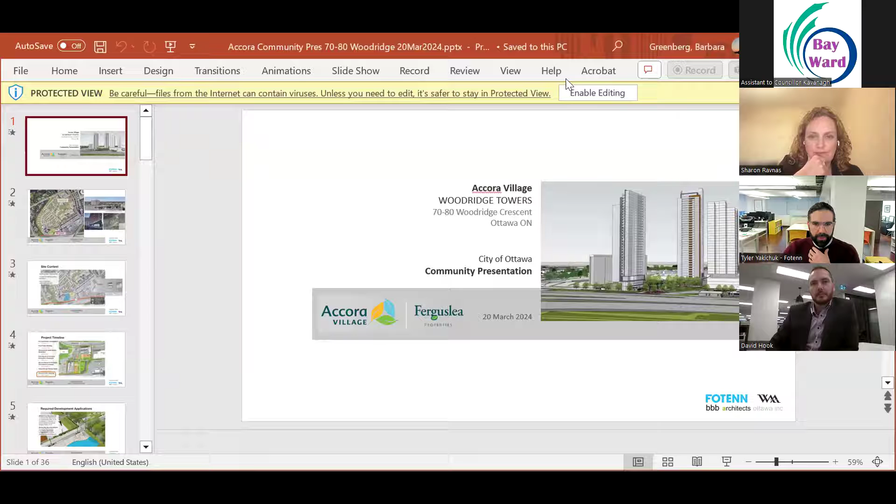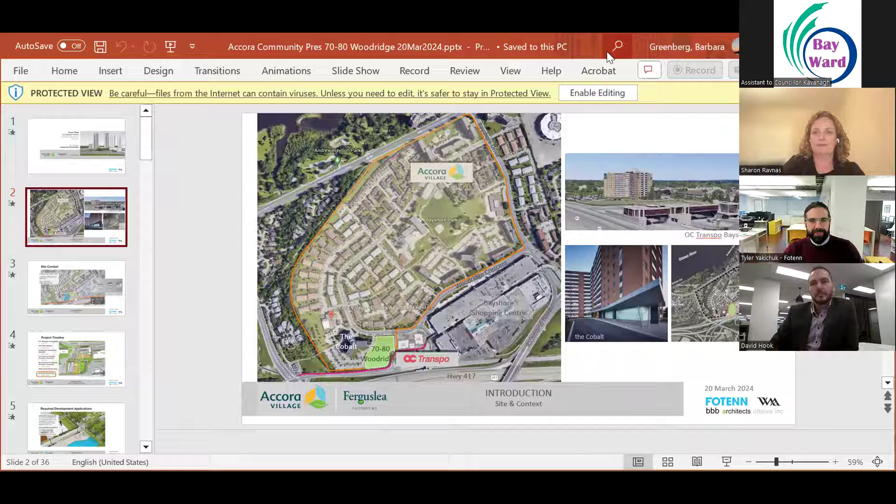Okay, so again, welcome everyone for coming. My name is Tyler Yakichuk from Fotenn Planning and Design, representing Ferguslea, and we'll be walking you through at least the planning portion of the 70 and 80 Woodridge Crescent design proposal. We'll let Barbara get the slides going again.

So although I'm sure everyone is aware of the site, just a little bit of background context. On the left, you can see the whole of the Accora Village land properties. At the bottom south, identified in green, is 70 and 80 Woodridge, right beside the Cobalt, which is also roughly about center of your screen. You can see the recent updates done there. And just to the east is 100 Bayshore, a recently approved development of, I believe, 30 and 27 or 28 story towers. And of course, with the rapid transit station abutting, as well as many amenities such as the shopping center.

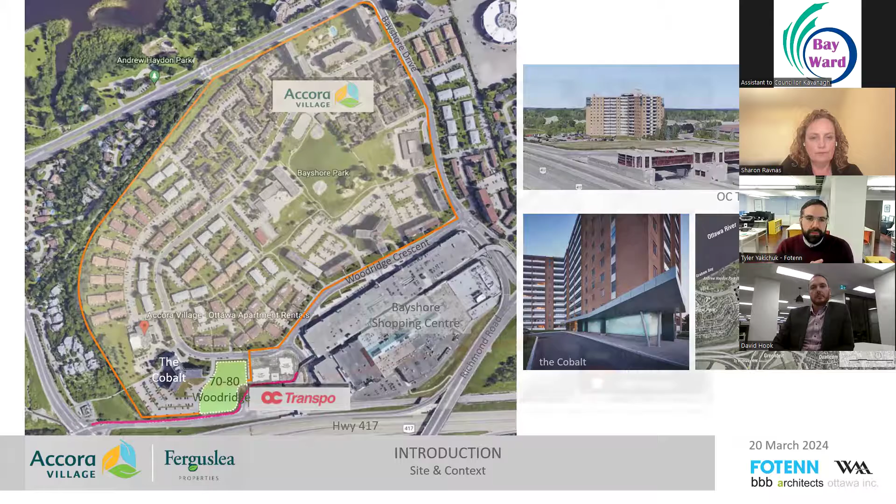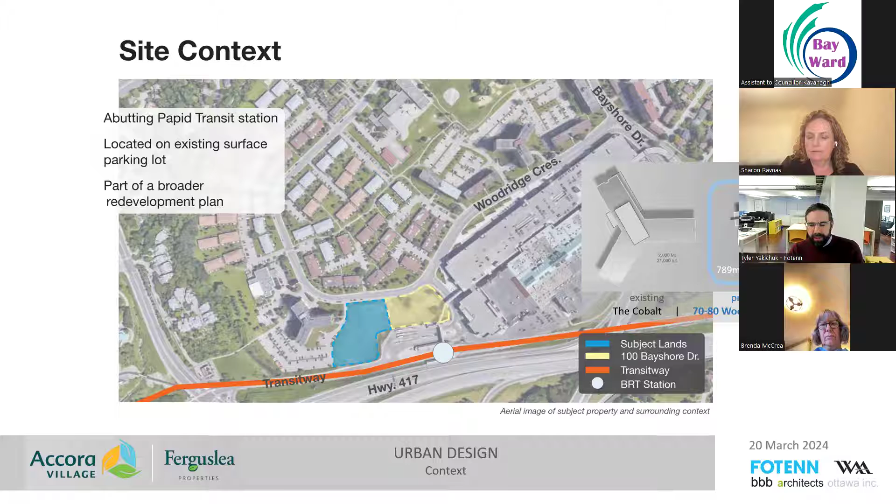Next slide. So getting a little closer in on the site, you can see the subject property of today, again, beside the Cobalt and 100 Bayshore. I'd like to point out on the right side, highlighted, you can see the proposed floor area for the buildings at 70 and 80 Woodridge at about 790 square meters, which relative to our neighbors on either side is a fair bit smaller, which will represent a much smaller shadow casting across the rest of the Ferguslea property as the shadow moves through the sky. Next slide, please.

So discuss the project timeline and where we've started and getting to where we are today and moving forward. This started - the very first formal meeting happened in June 2021, although conversations between Ferguslea and consultants had been happening many years prior to that. It was at this meeting where city staff would have had their first opportunity to review initial concepts as well as provide the required list of studies that we needed to undertake. And as Sharon mentioned, over 2 years ago now, we had our first public meeting where we provided the initial design, similar to the one seen right here. We then formally submitted all of our studies and design work in March of 2022. We received our first review of our application in May of that year. Concerns at that point were relatively slight.

There was a little bit of an issue or concern pertaining to the proximity of the tower fronting Woodridge relative to 100 Bayshore, as well as a bit of landscape questions. We resubmitted and got our second round of technical circulation comments in January of 2023, which again, tower location and landscape were city's concerns.

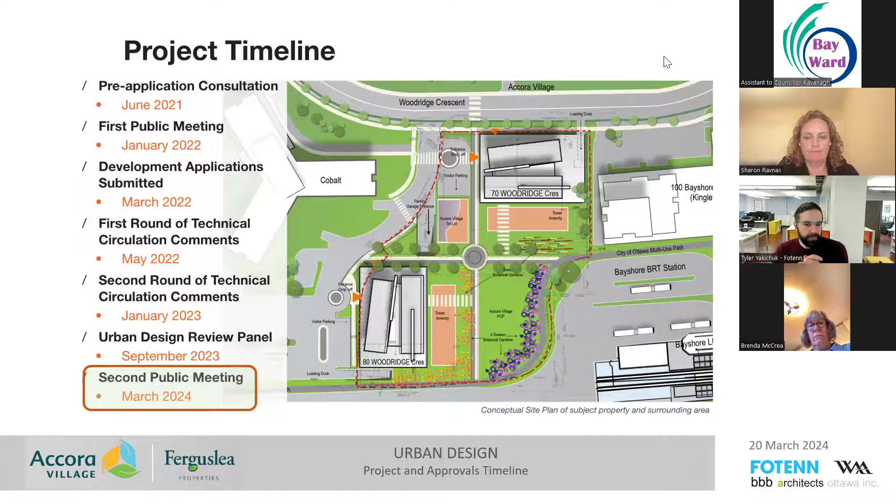So the development applications that we provided the city at their request was first an official plan amendment to remove this site, much like our neighbors of 100 Bayshore, from the requirement to have a secondary plan undertaken in advance of any future development. We believe that this site is very unique versus the rest of the Accora Village property, and therefore shouldn't necessarily be required to go through that same review, given that this was a greenfield site versus the redevelopment of the rest of the area, as well as a zoning bylaw amendment to rezone the property from its existing zoning to a zone more appropriate to the type of development we're contemplating.

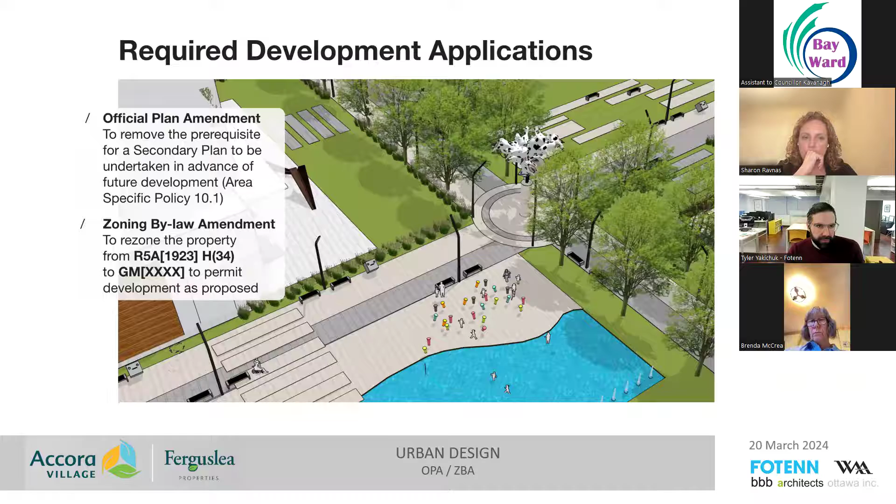So getting into why we feel the design is appropriate given the City of Ottawa's policies, we'll look at the official plan and you'll note that the property is in an area designated as a hub. These are areas that the city has decided are areas of specific proximity to rapid transit and areas specific to greater levels of density or intensity. Specifically, the closer we are to rapid transit stations, the more height and intensification they anticipate.

And given that we are abutting a rapid transit station, the maximum 40-story height limit we felt was appropriate for the site. Also, given that the area has an evolving neighborhood overlay, it would indicate that the city foresees this area as having an eventual ramp up in intensification, another reason why we thought the design we're contemplating is appropriate.

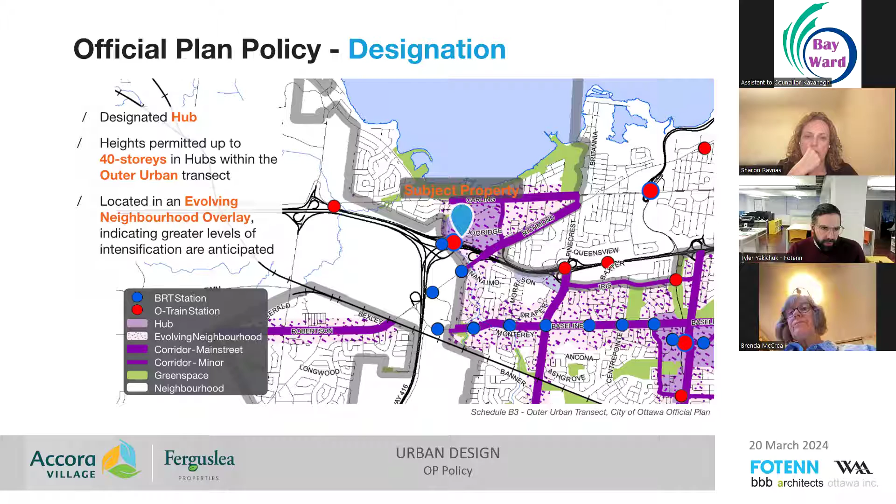So again, looking at the existing zoning, it was designed, or the zoning was more in line with the Cobalt and was provided at the time that that building was designed, which is no longer appropriate considering both the time we live in now, the new official plan, and what we're contemplating.

So as such, we are going to be looking to rezone the property general mixed use, similar to next door, as well as have specific zoning provisions such as height and some setbacks, or amending some setbacks to work with our specific design.

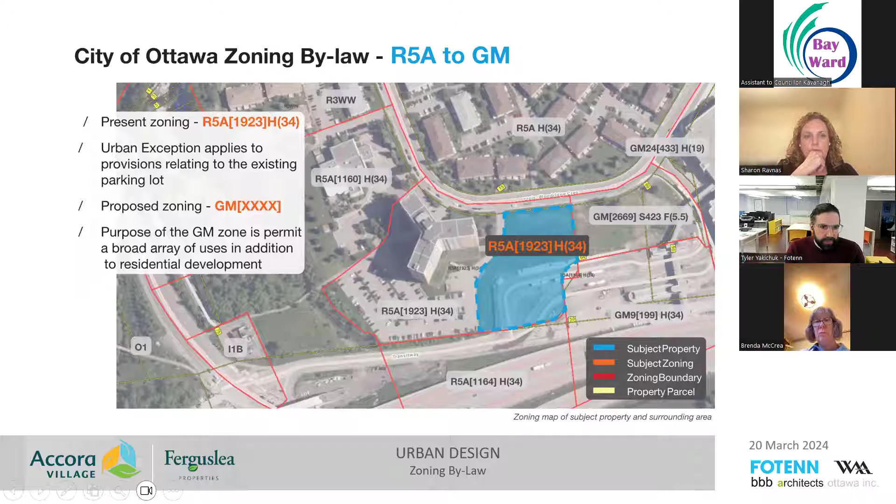So getting more into the design specifically, the development statistics are, we're looking to provide 2 towers, one of 40 stories fronting Woodridge, and at the south of the property, a 37-story tower.

The unit counts are flexible at this point because the unit mixes have not been set, but there is a general range of between low 500s to high 500s. And as I already noted, the typical floor plate is relatively small at 789 square meters. There'll be about 4 levels of parking contemplated at this point, with a parking rate in and around 0.8 stalls per unit.

And now I'll hand it off to Derek to go over a more fulsome review of the design. Thank you, Tyler. You can go to the next slide, please.

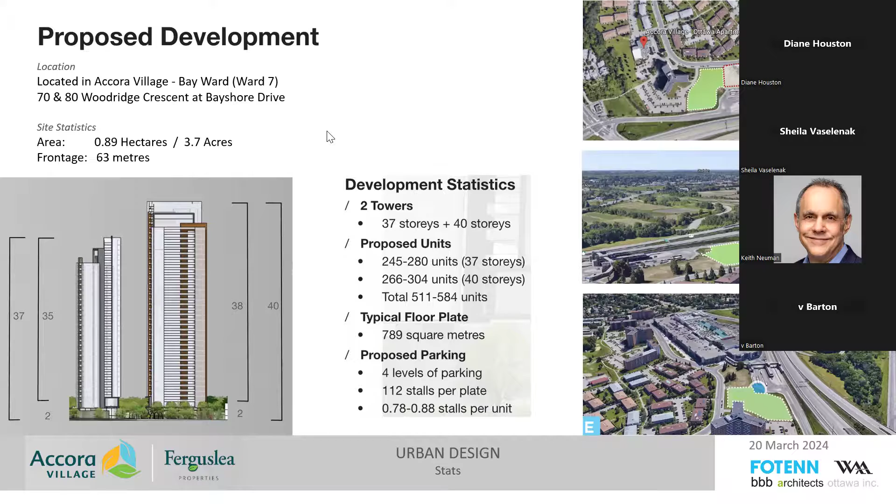I think that levels of parking is actually incorrect. I think we only have 2 levels of parking, but underneath both towers, so there's 4 areas, I think is what that meant to say.

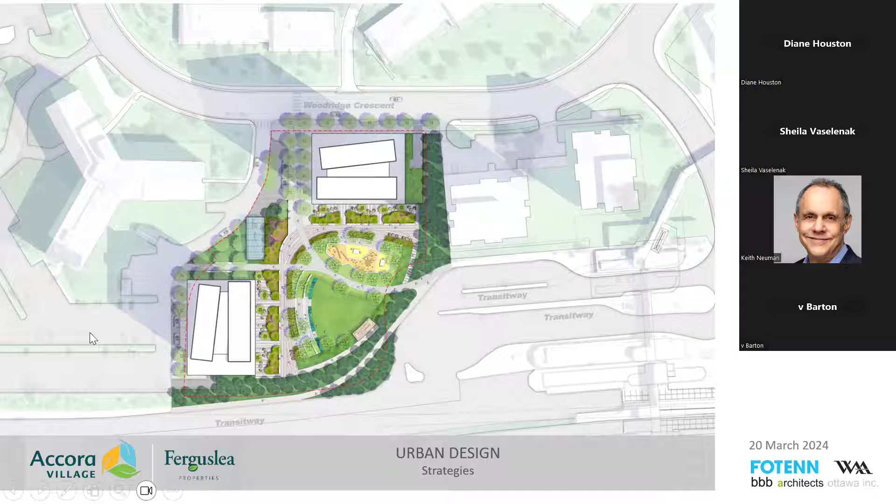But what I'm going to do, I'm Derek Hardy from BBB Architects Ottawa, and we've worked with Fotenn many times on developments like this, and with Ferguslea on a few of the projects within the village, so we're quite familiar with the neighborhood. And this is just an aerial site plan to show how the landscape has evolved since we started. I just want to walk you quickly through some of the strategies, and then we'll open up to your questions and answers after that.

I'm not going to go through all the planning decisions behind it, but I wanted you to know we're looking at a few high-level principles: this site has to be a gateway and an ambassador to the village. It connects the LRT station through this property to the rest of Accora Village, becoming a front door and common area for most of the community.

We're trying to put urban design first and scale the front low buildings down to something that suits Woodridge Crescent, and have the towers themselves rise out of a lower podium. This has been supported by the city as we've discussed the extent of the podium—they like the idea of keeping a lower 4-story or 2-story podium, with 2 stories above, closer to the street.

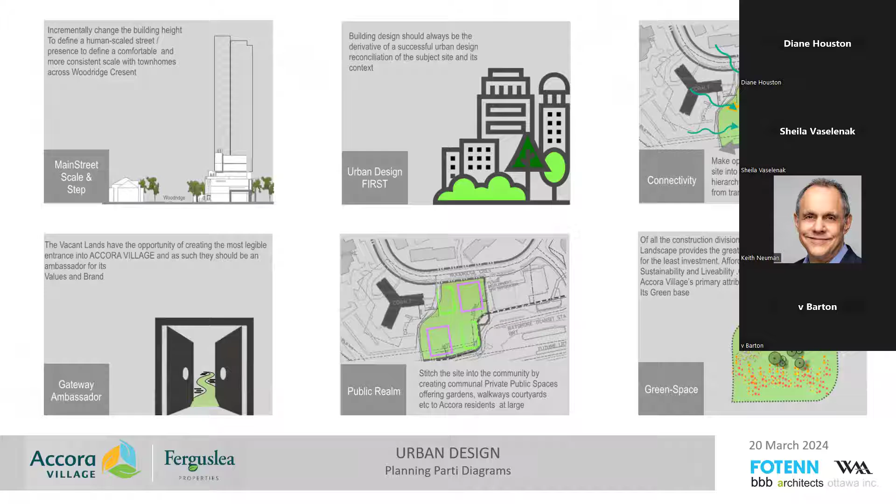As I mentioned, connectivity is important because it also goes to other residential buildings, as well as the LRT, Bayshore, et cetera, and a new development to our east. Lastly, we're trying to prioritize the public realm so it's really about the green space first, with the towers sitting quietly in the background.

The site's quite an odd shape, and that's partly why the towers are positioned as they are. To the left of us is the existing Cobalt building. To the right are the 2 new buildings from 100 Bayshore, and you can see the LRT is just at the bottom, literally adjacent to us in the southeast.

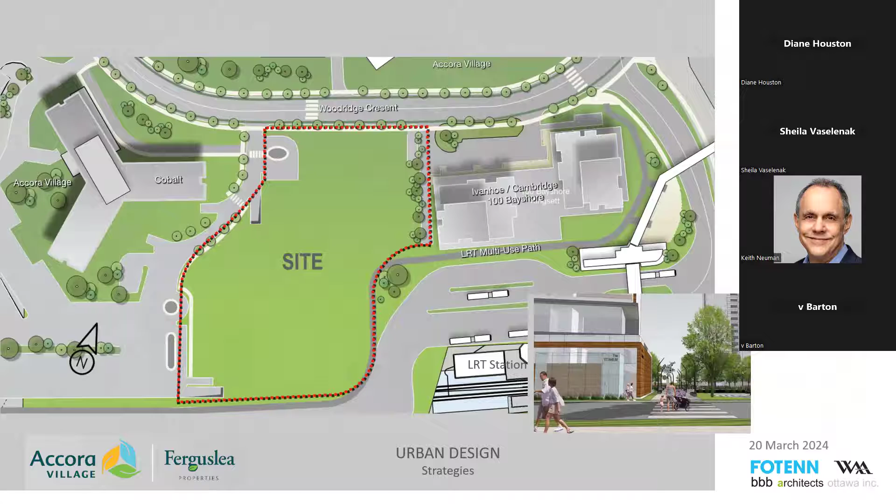This was just to talk about the setbacks. I don't think we need to go through this with this crowd, but with the city we've been working on exactly what the proper setbacks are.

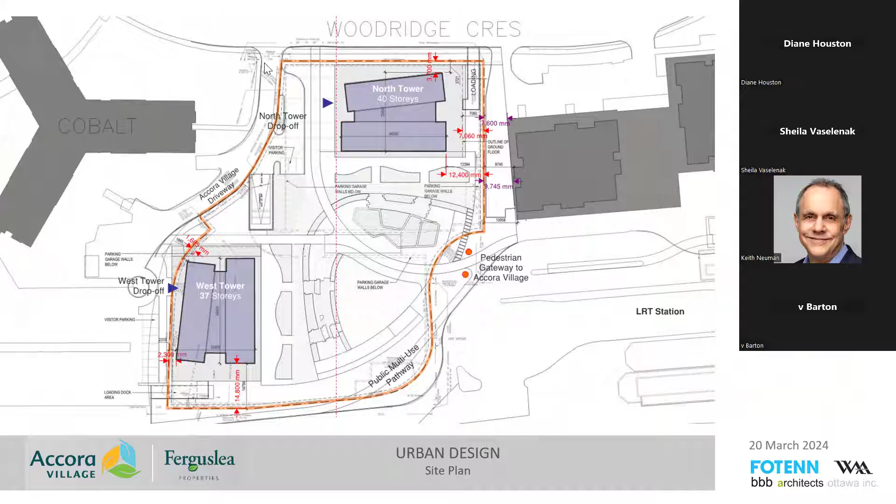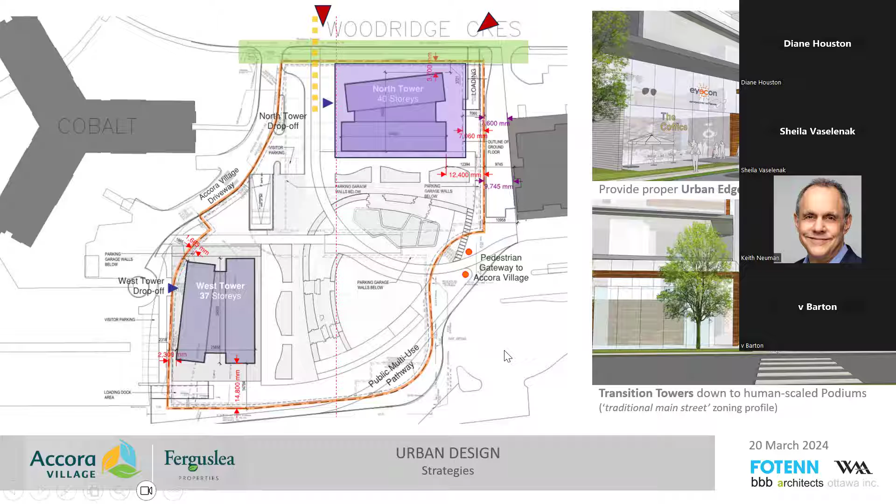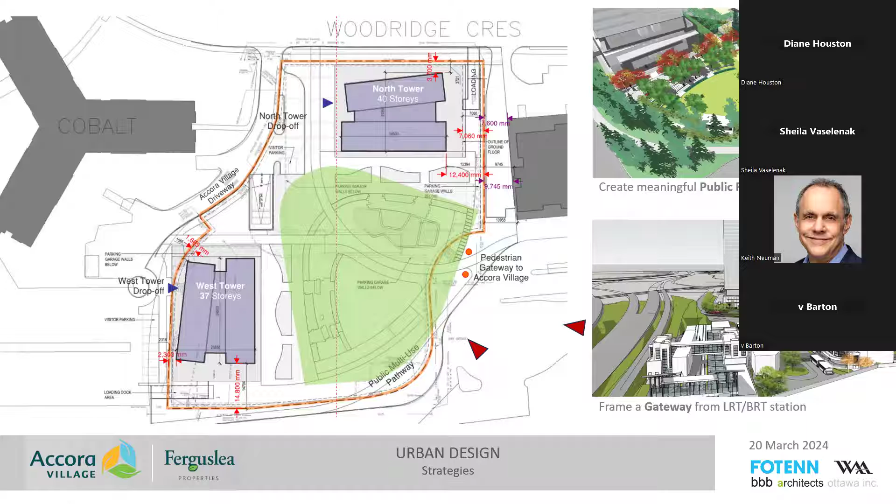The main change since the last time we were here was to really develop this courtyard as a much more significant public realm and garden, with a bit of a forest edge protecting it, presenting something of significant stature to suit the entry to Accora Village.

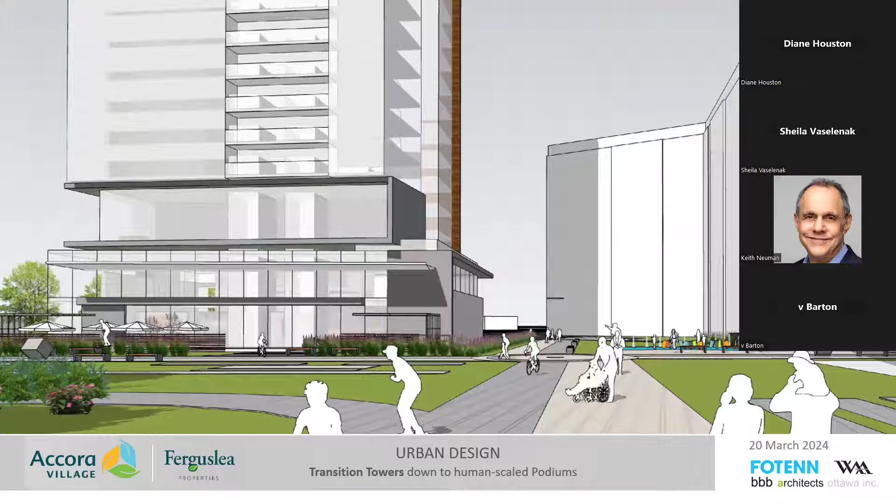This is a view from down low with the Cobalt on the right and the podium, showing there's a 2-story podium and then another 1 or 2 significant stories above that before we get into the tower. The idea is that this whole project sits comfortably on the ground, with the tower rising out behind, slightly set back from the front buildings.

These are all early designs. I should qualify that we probably have more rendering and detail prepared here because of the city's questions than we'd typically do at a zoning level, but it is the design intent of where we're headed with the project. There are only 2 levels of parking below grade, although there's 2 under one tower and 2 under the other, in phases with a ramp down the middle.

On the right, what you're looking at, the gray box, is the Cobalt building. The grid on the right is all of our parking, which eats up most of the property, but we have a large 1.5 meter landscape berm on top of it so we can plant trees, landscape, and trail on any position above the parking garage. It can be phased, with the blue arrows showing you go north into one garage and south into the other. There's no driveway directly onto the street—it uses the existing Accora Village driveway that serves the Cobalt as well, so the amount of frontage remains the same, uninterrupted along Woodridge.

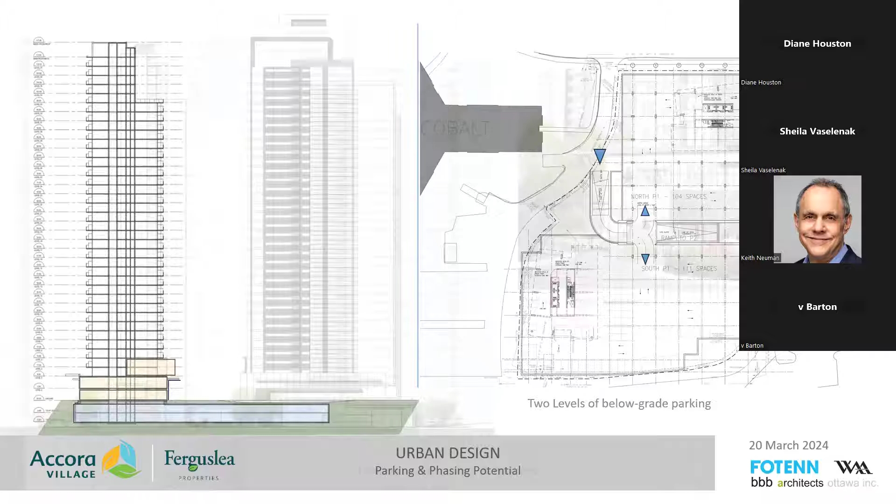Just showing the podium again from the side, to demonstrate we're trying to put a human scale to the lower parts of the building and then have the tower rise out of the podium.

The reason we've staggered the buildings this way isn't typical, but partly due to the site, we pushed them as far to the north and west as we can to maximize distance between the towers. It's a very small footprint, what we call a pinpoint or point tower. The idea is it makes a small, taller shadow that moves quickly across, as opposed to something with a much larger slab.

We've also kept the north tower close to the street, offset from 100 Bayshore, so we have views across and don't stare directly into their balconies. Similarly, we offer them views from their western facade into our new garden space and public realm.

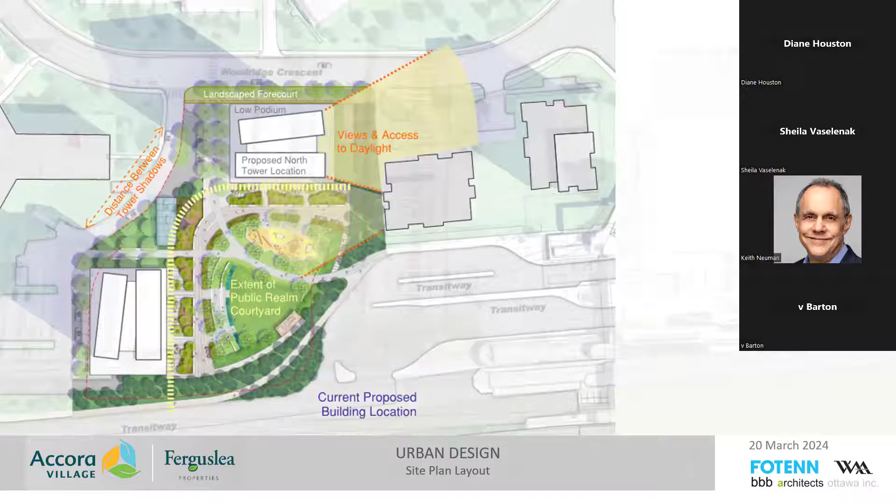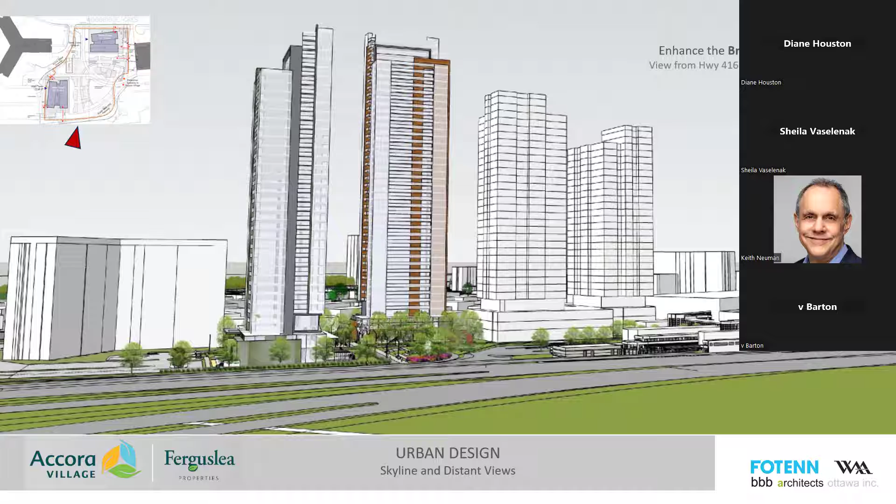That view is really important. We realized as we drove up the 416 that this site is almost axial to the on-ramp as you leave the 416 to the 417. So it's not only a gateway from the LRT into Accora Village, it's a bit of an identifier and skyline gateway for the whole city coming from this end, improving the brand of Accora Village. This is a new model for Accora to develop—certainly tall, but fully rental, so it supports the original concept and purpose of Accora Village.

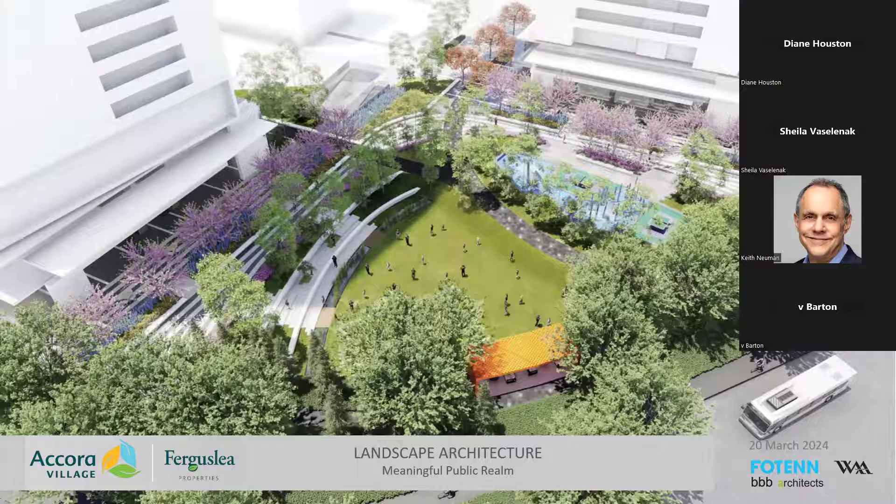This is an aerial rendering between the two towers showing the extent of landscape. To the south and west, we're planning a small forest edge to help screen it from the buses, and next to the building you see the lighter purple trees—they've been calling that the spine. That's a zone separating the public realm from the more private, proprietary space for residents, where the green lawn, forecourt, water court, and white benches for seating would all be public realm connecting the LRT into Accora Village.

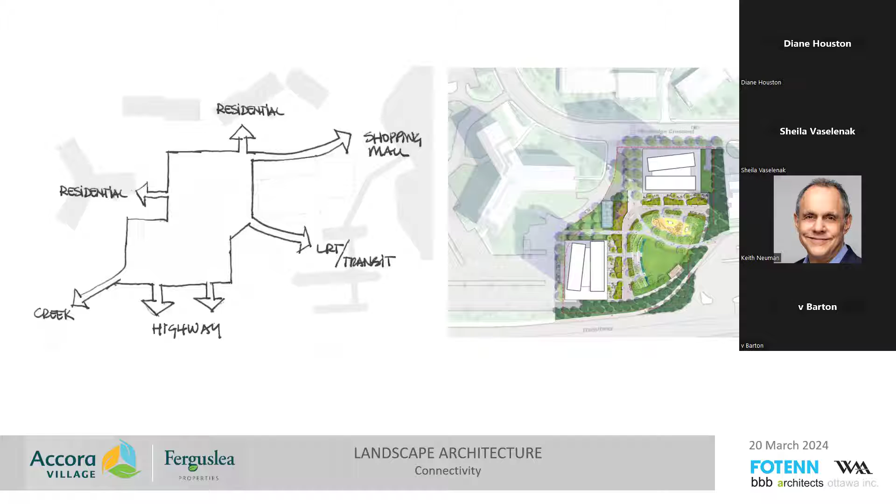These are just a couple of sketches. I really enjoyed working with WAA—this is the third project we've done with them. They're landscape architects from Montreal, and they bring a really human, humane quality to the development. Connectivity is important—getting you to the mall, to transit, and down to the creek to the southwest. These are quick sketches, so we can move through them fairly quickly.

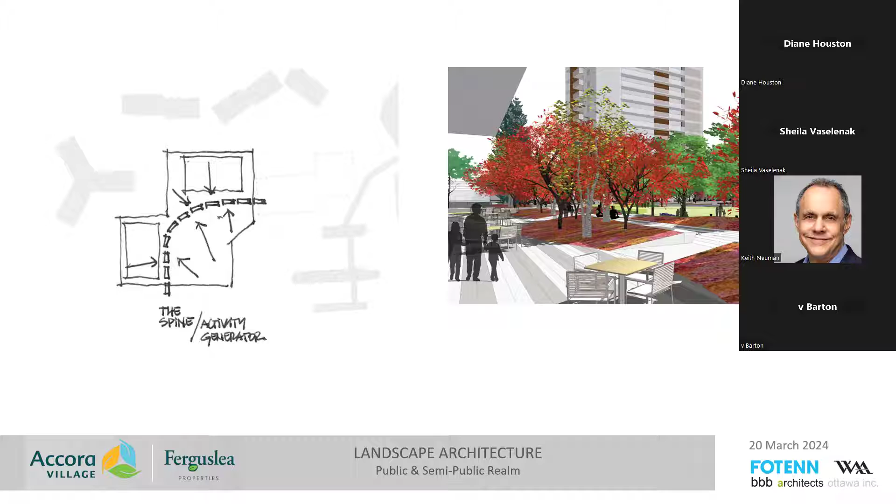The gap between the buildings—they felt the spine was really important, because if we're making it a public realm or public space, we also have to make sure there are spaces for tenants where they feel welcome to come down and have picnics or sit outside, not like they're just sitting in a public park. So the spine divides the active public spaces from the more proprietary zone for tenants.

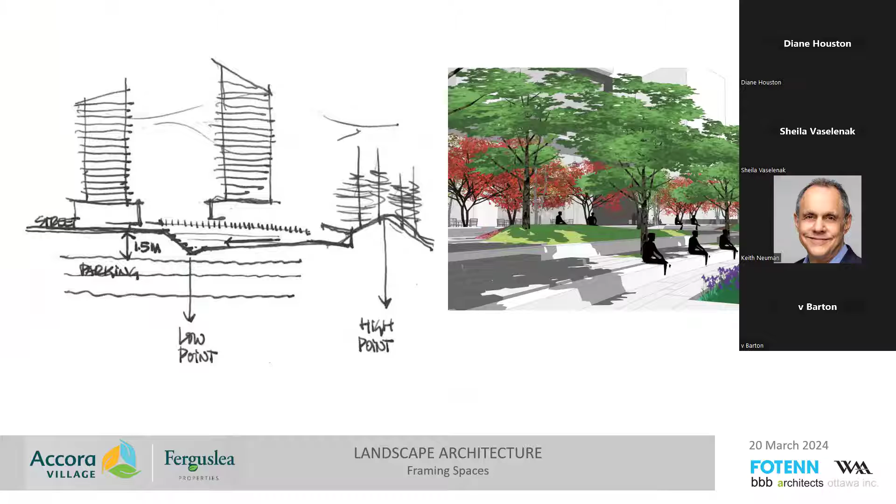The landscape isn't flat. With the 1.5 meters of coverage, we're taking advantage by stepping down where we can, where we don't need depth for deep tree root balls, and then having it berm back up. It also helps gather rainwater and slow down stormwater management as it leaves the site.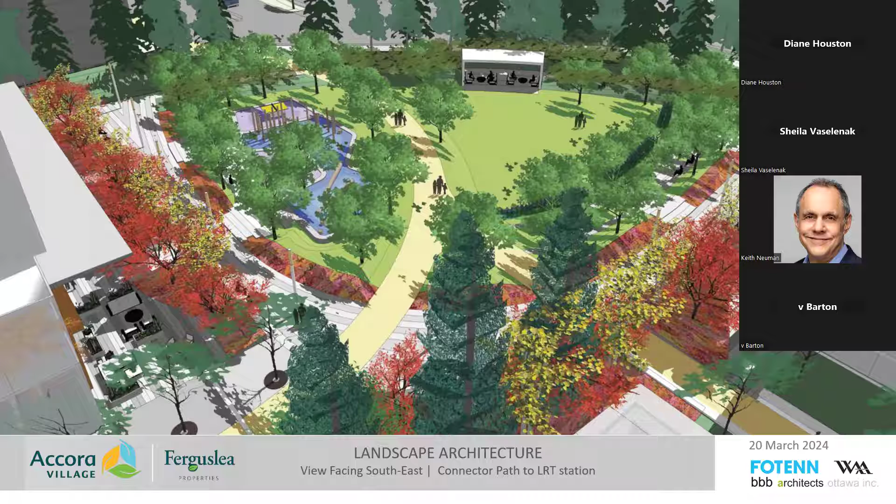This rendering is taken from the opposite corner between the two towers, looking back toward the LRT. You can see the yellow spine, or yellow walkway, through the middle—that's the public walkway from the LRT through our site—while the white curving walkway closest to us is the spine, the perimeter boundary. The rest is a water park, with a proposed children's play area, possibly a splash pad, and a bit of an amphitheater or band shell for spontaneous events. The lawn could be used for frisbees or just sitting and having picnics, open to the public.

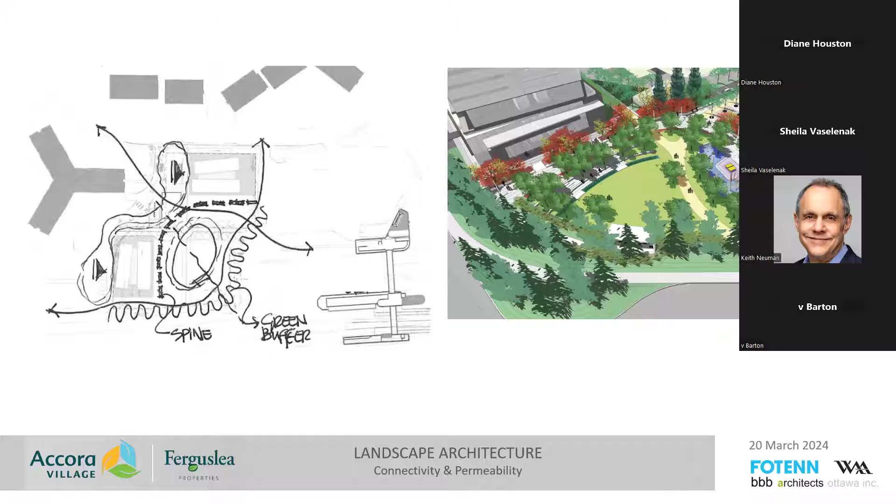This connectivity diagram on the left, as scribbly as it is, we felt it was important to suggest that while there are two important entries to the tower, the rest of the movement has to be able to cut across the site and somehow be protected. Because we are very close to the highway and the LRT station, the ground level experience has to be buffered from the noise and traffic.

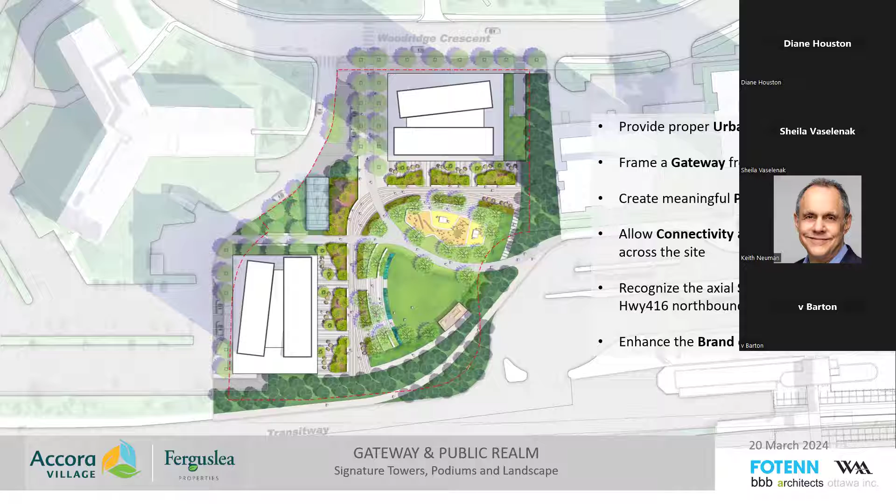We're obviously allowing connectivity. There's no reason to restrict it. In fact, the safety for these kinds of public spaces is counting on people moving through the site regularly, and recognizing that it has a significant role to play for the whole city as an axial view.

They require us to provide every 2 hours at the spring and fall together as one, and then the summer and winter equinox, or solstice, as the other. So we put these in. I just extracted a couple, or we decided to show you a few of them just to give an idea. So, thank you, Barb.

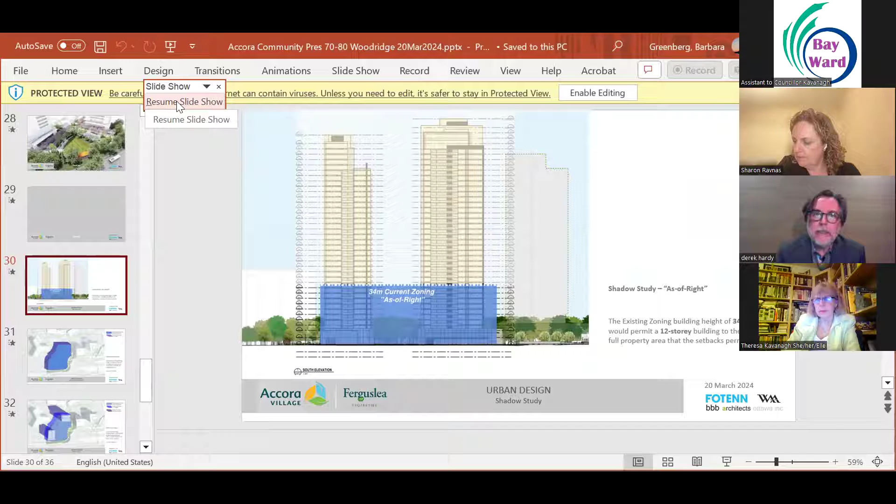The way the city does the new shadow study, or requests the shadow studies, is that we show the shadows you're allowed to do as of right, and then you superimpose the shadows of your project, because you're doing a rezoning for different heights. This currently has a 34 meter height for about a 12-story building, which is in blue.

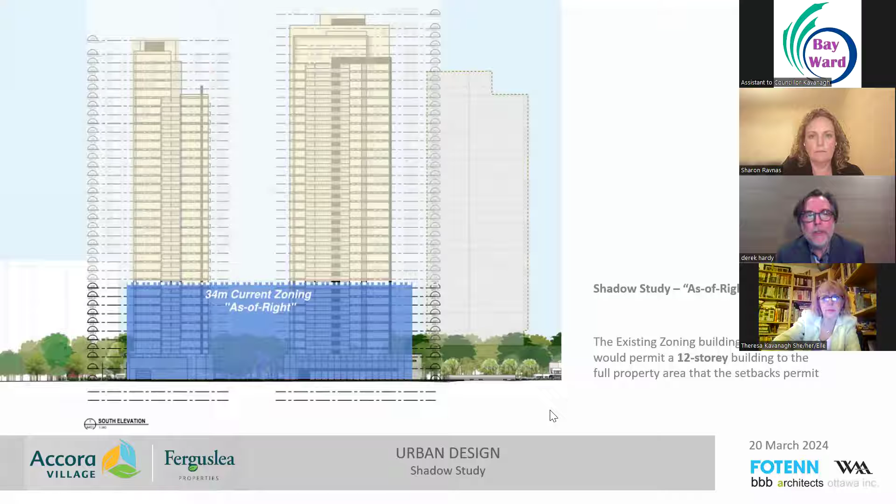And so at 37 and 40 stories, we're about 3 times the height of the zoning. But you are also allowed to build to full property. So the next slide shows it in plan.

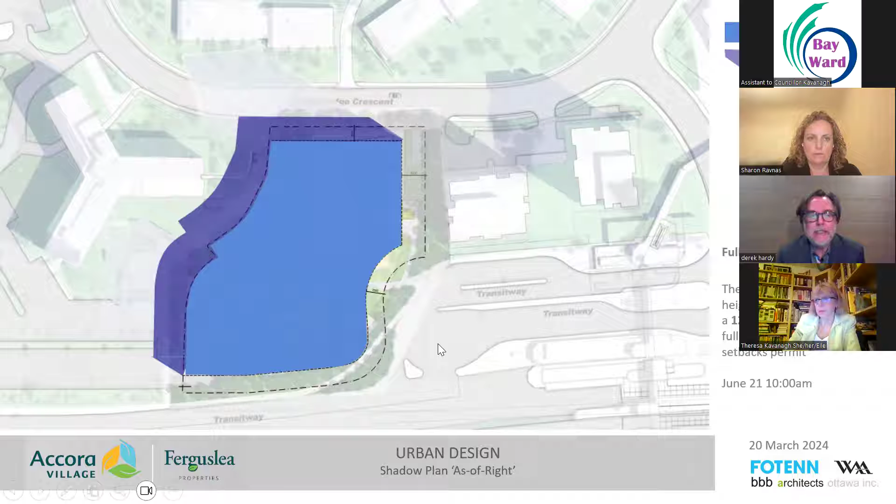And the next slide shows, I think, the same time, June 21st, 10 a.m., with our 2 towers. Basically what the city wants to know is the area that has a darkest gray-blue with an orange outline is the difference between what we're allowed to do and what our proposal is requesting. If you click to the next one, the shadows will just move around.

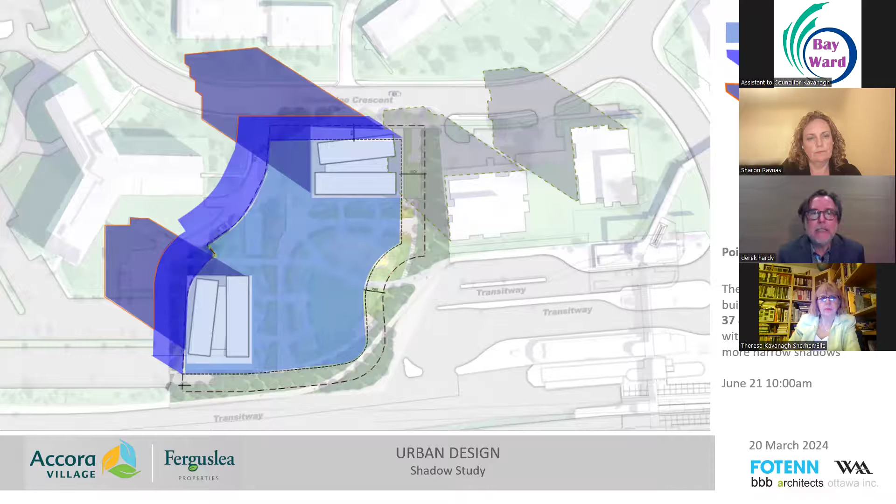So at June 21st at 1:30, this is sort of the middle of the summer, just past noon, you can see the shadows from 100 Bayshore and our 7080 Woodridge at the same time.

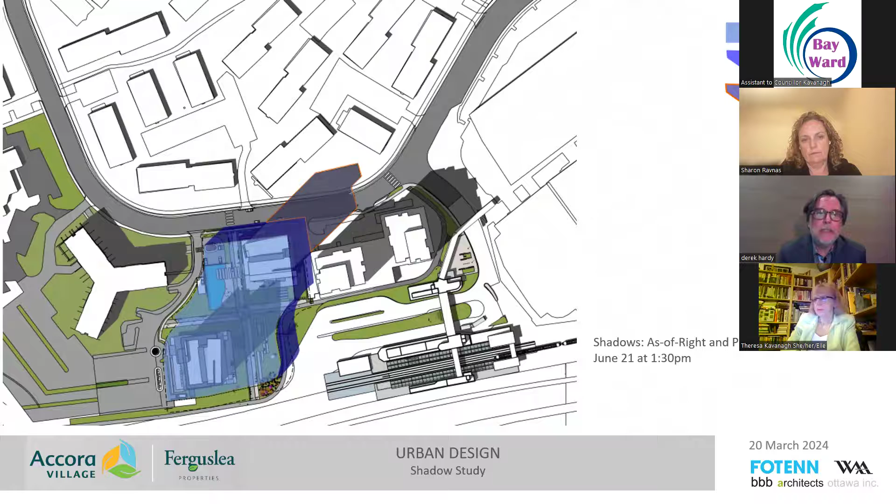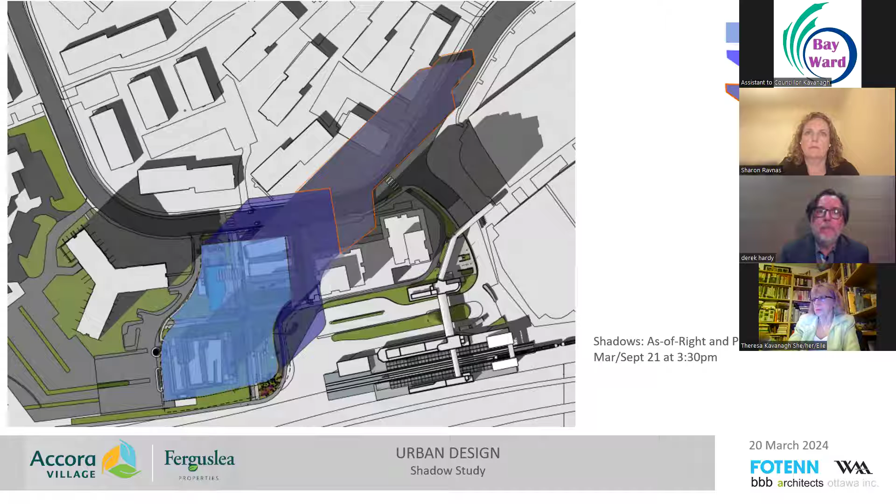Next, please. As you move around the same time of year in the spring and fall, they have the same sun pattern. By sort of a later afternoon, the shadows are starting to get long again, and it goes to the northeast. Ours are kind of going parallel to the 100 Bayshore tower.

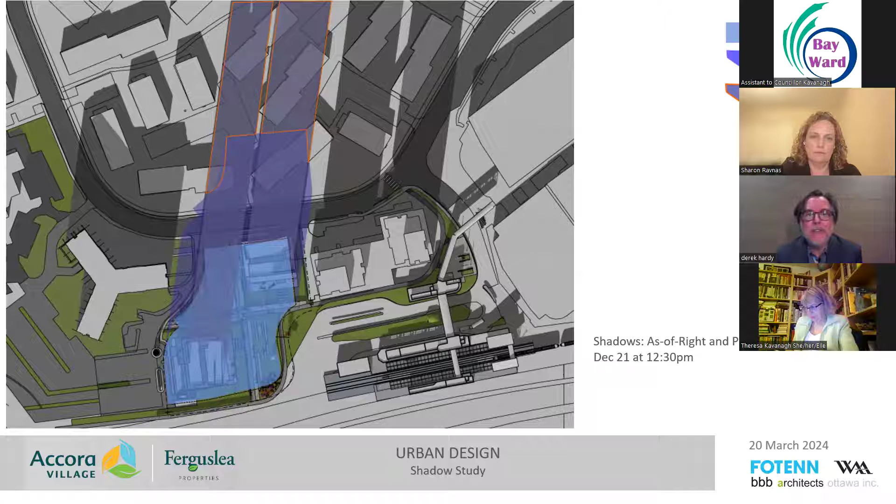Next, please. And then finally, in the middle of December, even at high noon, there's not much you can do in Ottawa. The sun is at such a low angle that any building—the Cobalt to the left stretches across the road, and our towers and 100 Bayshore will all reach across the road and across the buildings for a period.

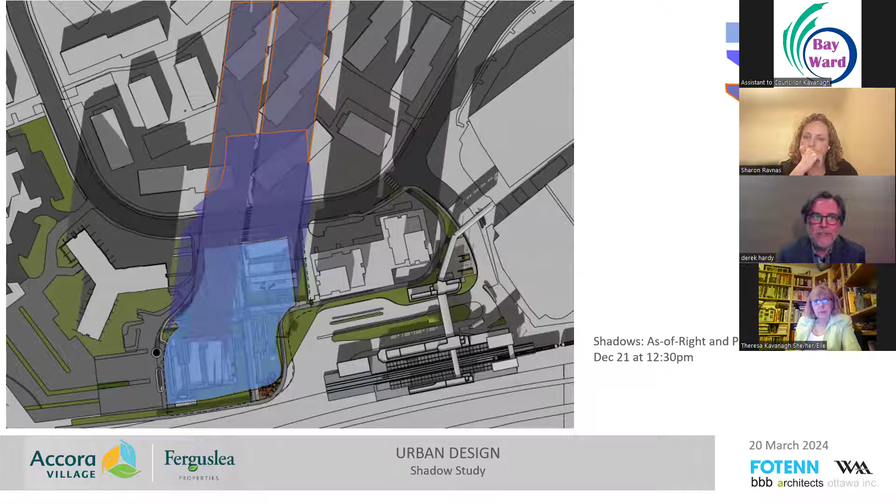But again, as point towers, the whole purpose of designing small floor plates is, if we put this in an animation, you would see the towers are far apart, then as they move and get to this angle, they get close together, and then they move by. So if they're shadowing somebody's yard, it should be for a few hours of the day, not the entire day. I think that's all I had for this round. Thank you.